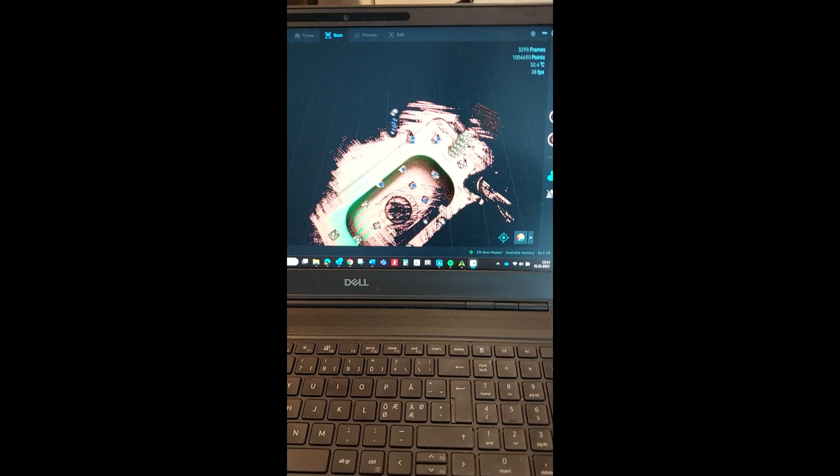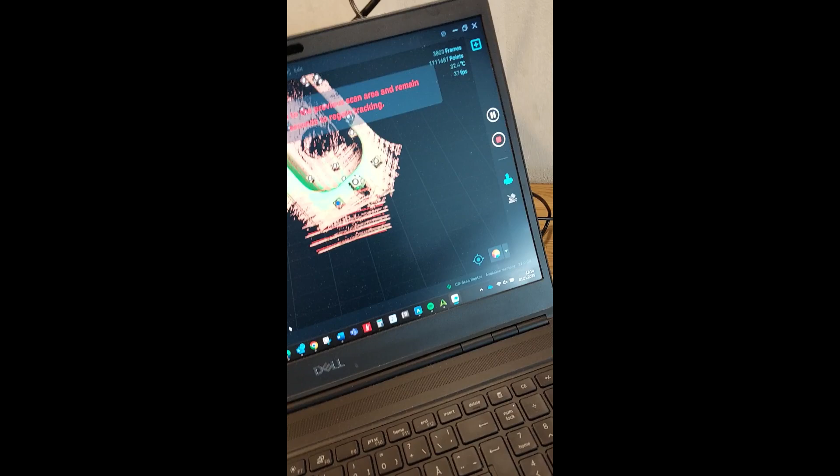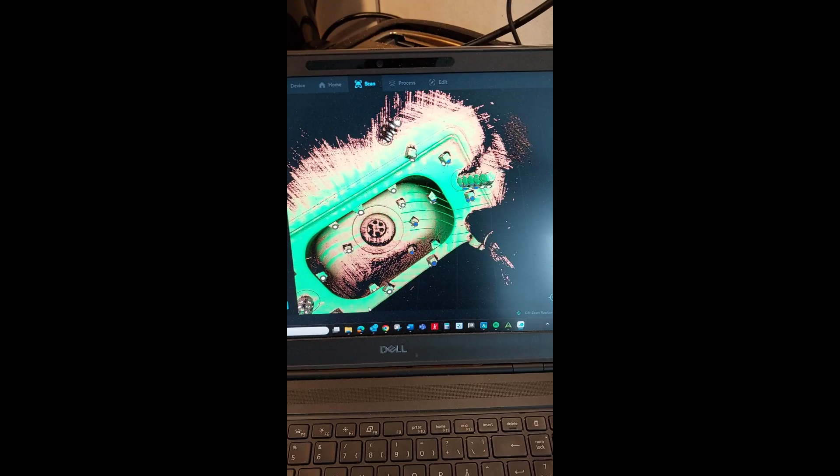Model is almost green everywhere. That's perfect. I think this isn't so accurate, but I think this is good enough.

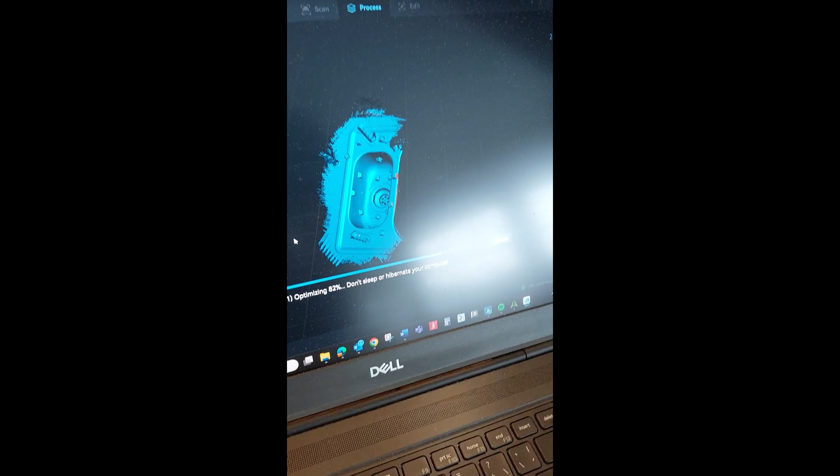Take some time optimizing the object, remove the markers, and prepare it for meshes.

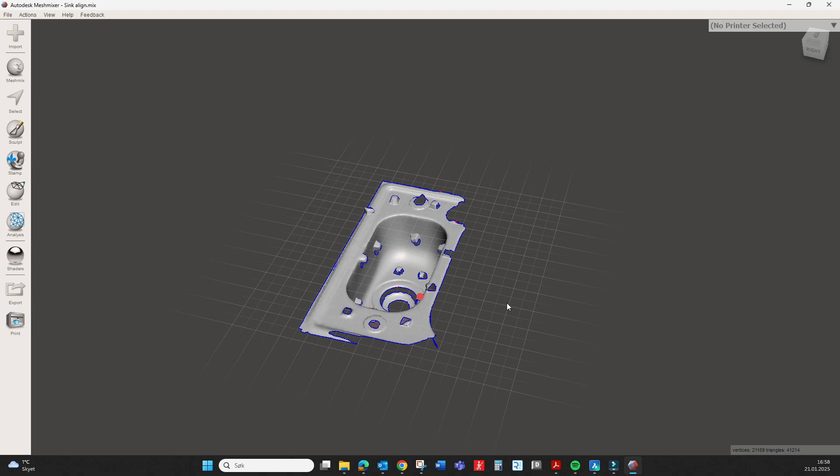Here we have taken this meshed scan into Meshmixer just for adjusting to the grid.

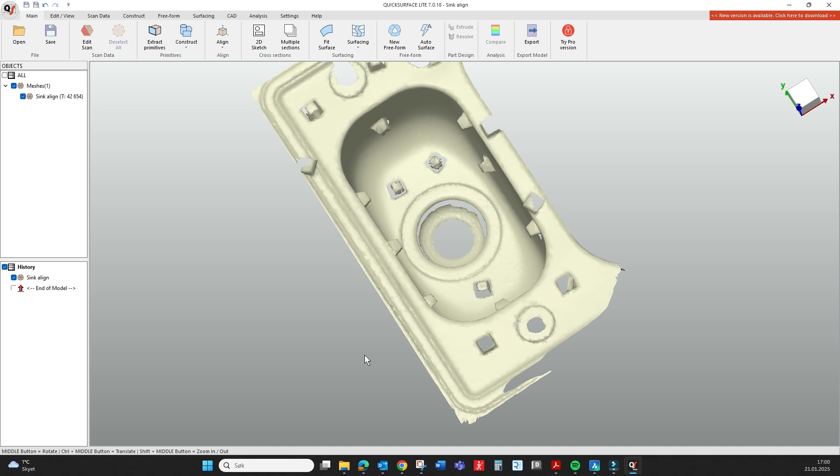And we take the model into Quicksurface, just for taking out this surface into scan.

Then we have modeled this sink strainer, done in BricsCAD Ultimate modeling. We have made this hexagon pattern, 5mm opening.

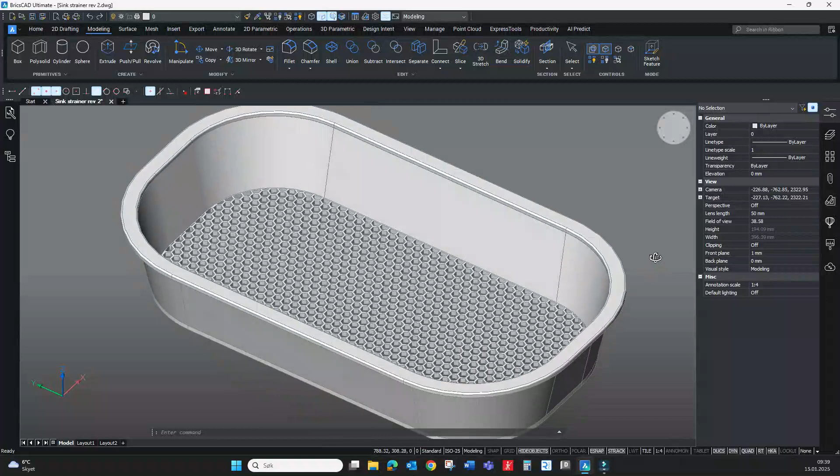So now we plan to 3D print this prototype.

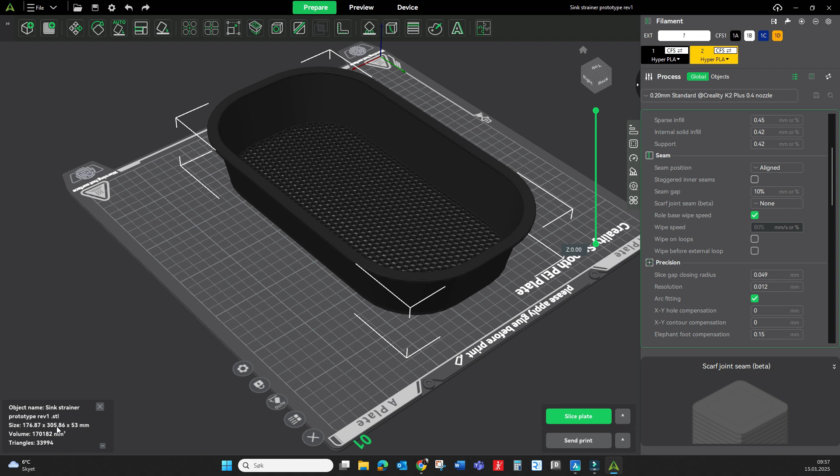Okay, then we have opened Creality Print and brought in this STL file. As you see, this strainer size is 305mm length and width is 176mm.

To prepare this thing, so...

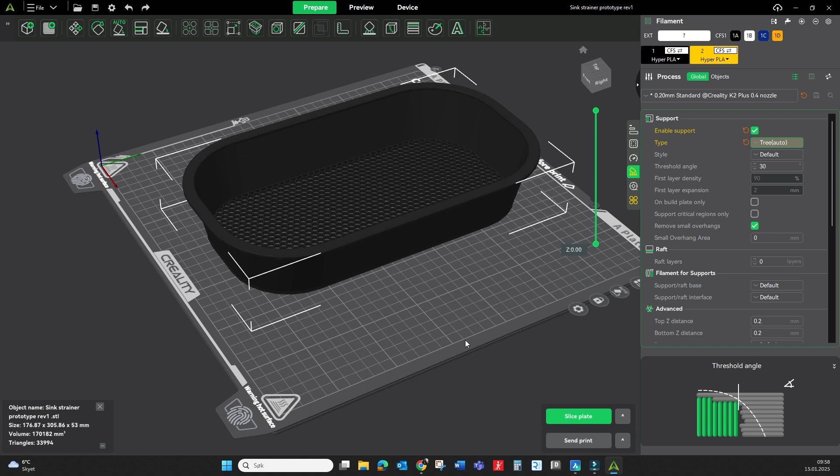Just choosing Creality printer. Let's choose the PLA black. So this.

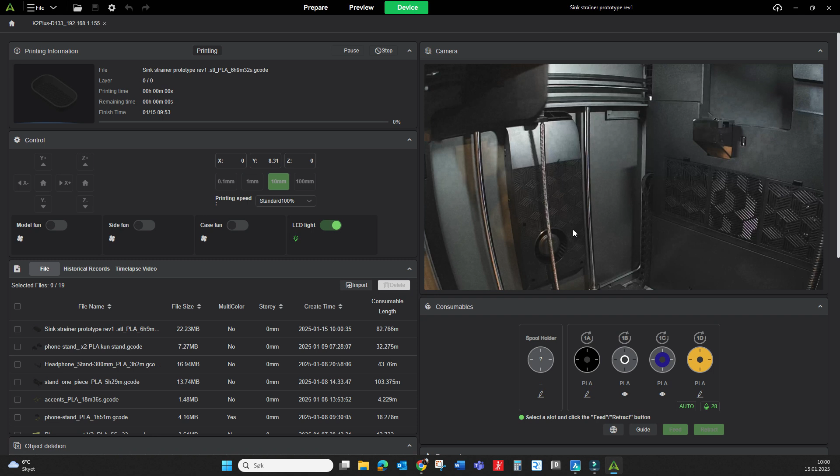So loud, they can hear us now.

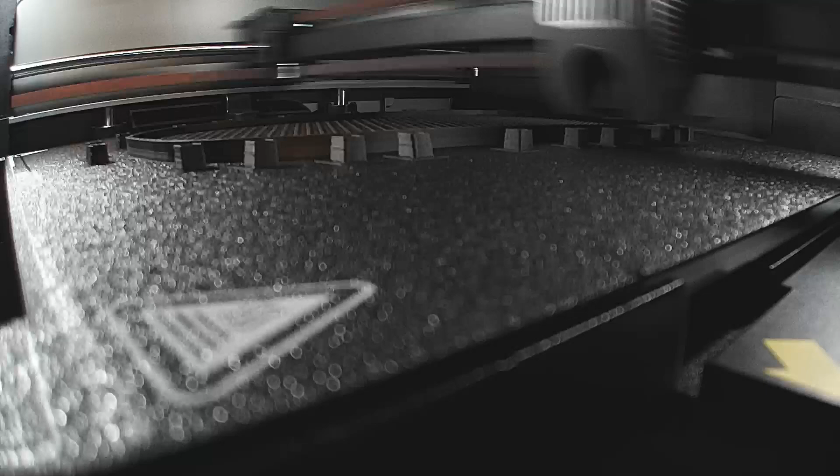Okay, then we have to test the prototype. Does it fit? It fits 100%. Well done.

Let's let the good times roll.